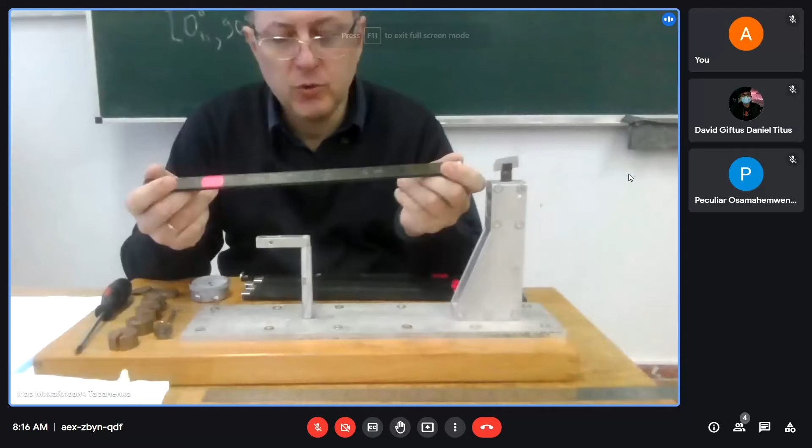Beams are the same. 0 degree, 15 degrees orientation, 30, 45, 60, and 75.

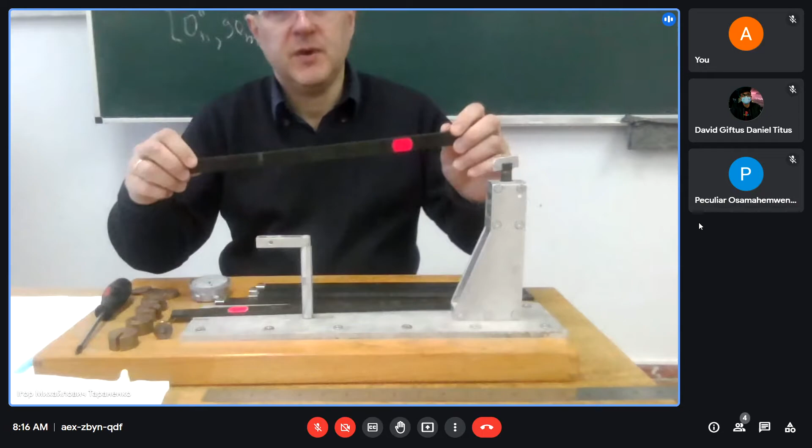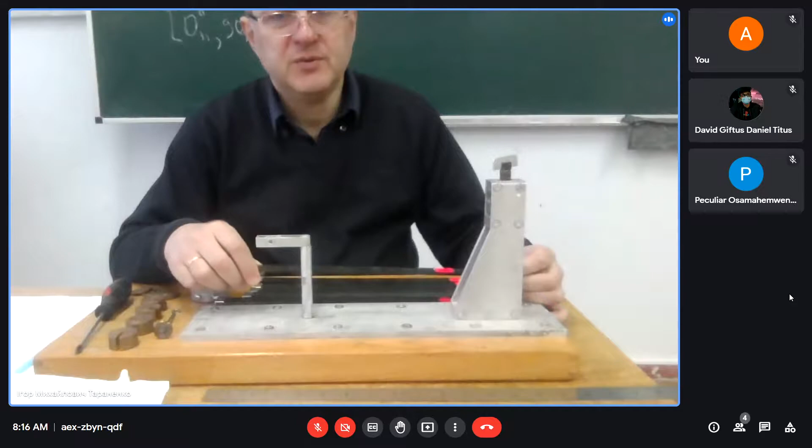Manufacturing process is the same, but during manufacturing some variation of dimensions can happen due to linear expansion, due to non-uniform spreading of polymeric resin through the fibers.

So we will calculate the average dimension of this beam. We need to know the height and the width to calculate the inertial moment. We need to know the length of this beam to calculate the deflection according to known formulas from the mechanics of structural materials.

And for this purpose, we use a very simple installation. It's a wooden rigid beam basement, and the device which simulates the clamping.

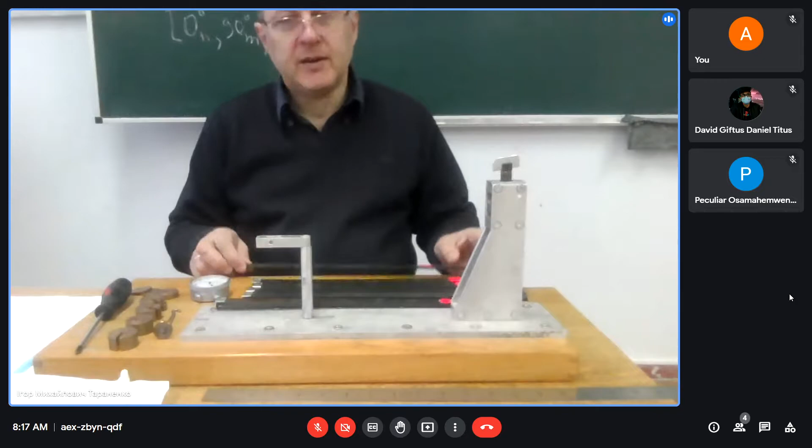So I can insert this beam, then tighten the screw. This means I simulate the rigid clamping. It's not absolute, but we assume, as our first assumption, that this is a rigid clamped beam.

Then we have, known for you from the course of interchangeability, the dial indicator. The dial indicator permits us to measure deflection.

For more precise measurements and local deformations of beams, we can use tensometric strain gauges. For absolute deflection for this lab it's quite enough to measure the deflection or sagging of this beam.

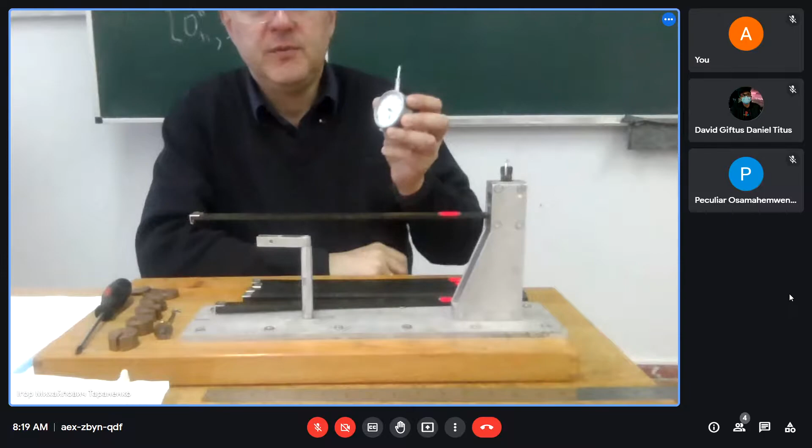So you remember that this dial indicator has divisions. One revolution of the long finger means a deflection of 1 millimeter. We have 100 divisions, so the spacing between any neighboring division is 0.01 of a millimeter.

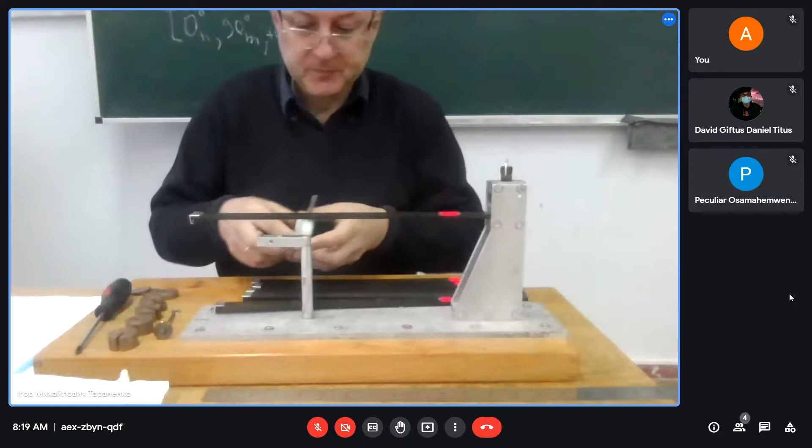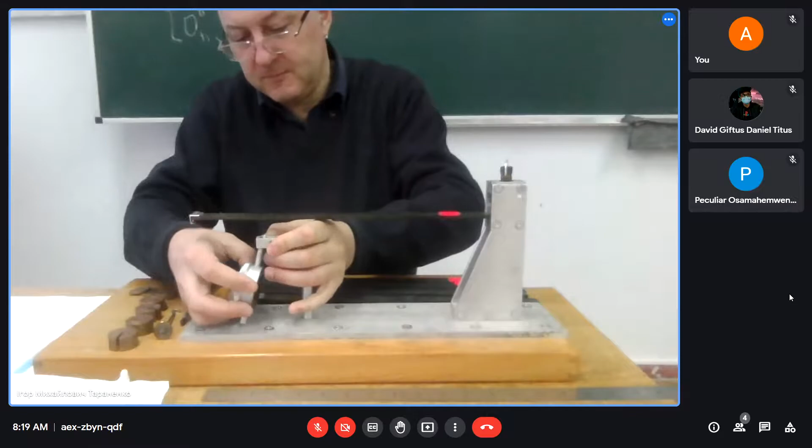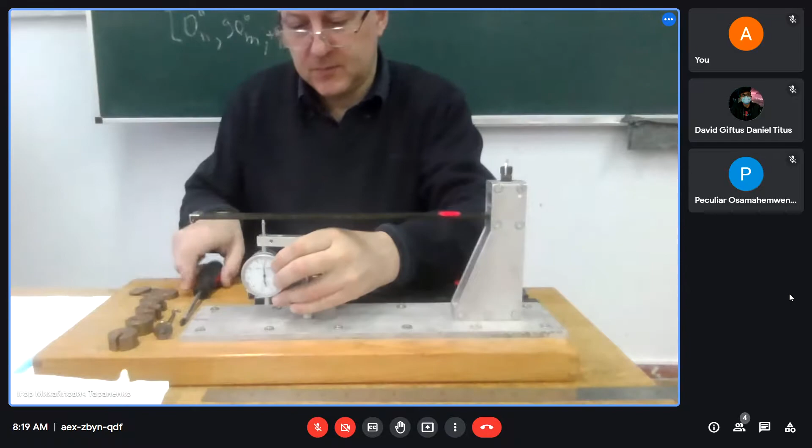So I can attach this dial indicator to the special clamping device. Clamp it with a screw.

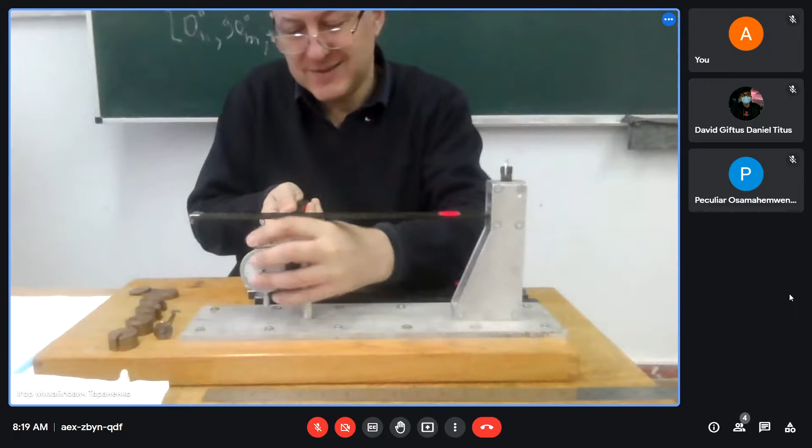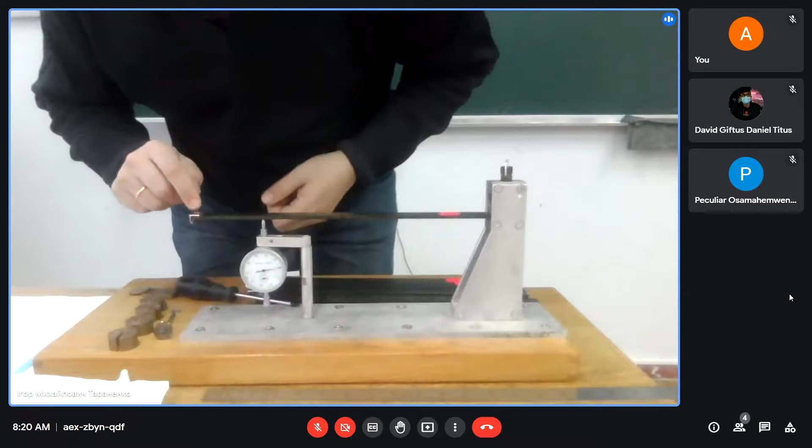And we can see, if we apply lateral force, the finger rotates, and we can measure deflection expressed in hundredths of a millimeter. For this purpose, we use a hook and a small platform.

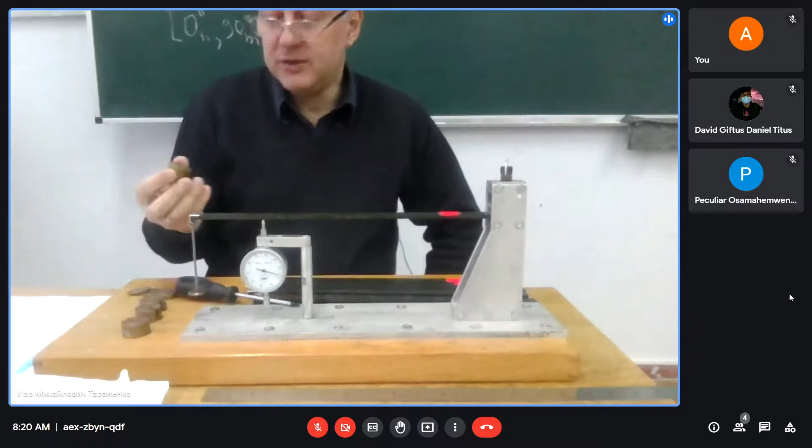On this platform we can hang weights of known mass. The mass is stamped here, for example here we can see 100 grams. Then for calculation we will convert grams to the international system, so we will operate in newtons.

I will consequently hang such weights one by one, calculate the total weight, convert to newtons, and measure by the dial indicator the corresponding degree of deflection.

And if we know rigidity, you remember rigidity is the product of elastic modulus by inertia moment. The inertia moment, as given in your lab with the drawn formula from the course of mechanics of materials, is width multiplied by thickness cubed, divided by 12.

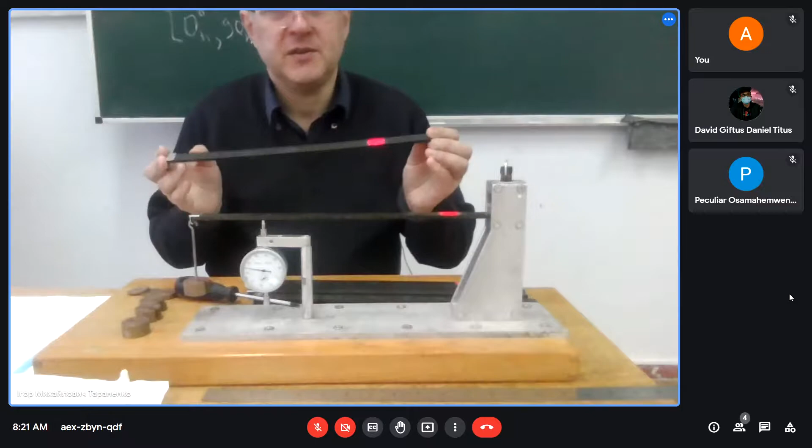So our task is to measure how deflection of the beam depends on orientation angle. We have 6 representative beams with different orientation angles, and we will apply 5 weights with a definite increment. Obviously, the more rigid the beam, the more weight we need to apply.

So the manufacturing process is the same. It's forming in rigid dies. Temperature, duration, and applied pressure are given in your manual, you can read it at the beginning.

So I can open this also. The scheme of testing is shown on figure 1. The real installation you can see here.

Let's start our measuring. In the current situation I will do it in online form. You have to do it by yourself.

So let's start with the beam with orientation of fibers at 0 degrees. 0, I repeat, means along the length. I take this beam.

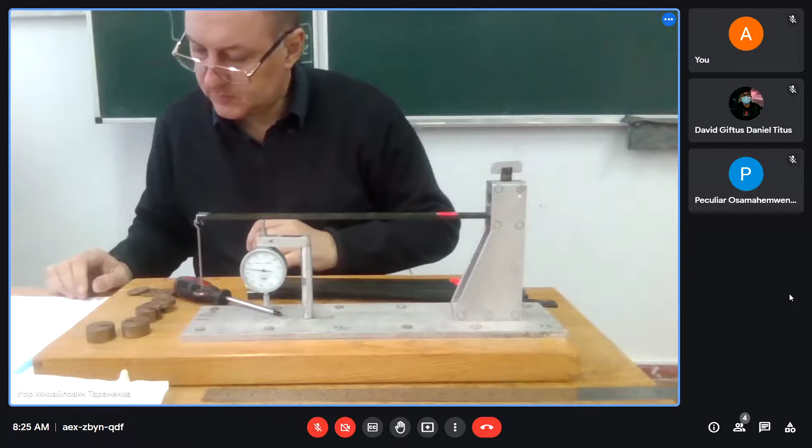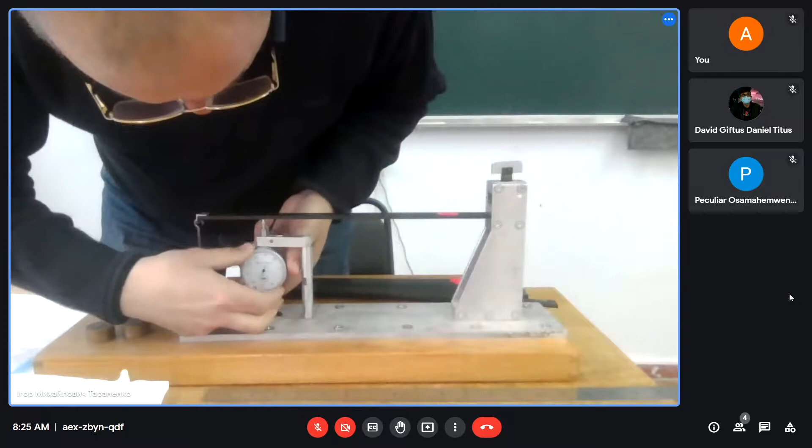So I adjust 0 here by means of rotation of this scale. I installed 0 on the dial indicator. And I apply weight with mass 100 grams, which is 1 Newton. Please write in the table: Q1 for specimen number 1 is 1.0, 1 Newton.

If we read, we can get 0.68. Please write 0.68. It's deflection V sub 1 for our beam with 0 degree. Right, where the cell corresponds to V sub 1, 0.68.

Then next increment, we add one more 99 grams. So totally it will be 199. Please write in the table, below, next stage of loading Q sub 2 for specimen number 1: 1.99 newtons.

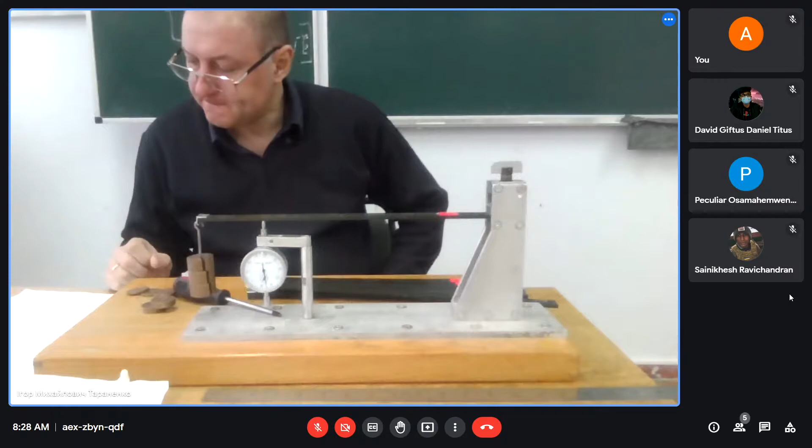Then we add one more increment, 48 and 49. So totally Q sub 4 is 3.95.

The deflection is 2.45, V sub 4 for the first specimen.

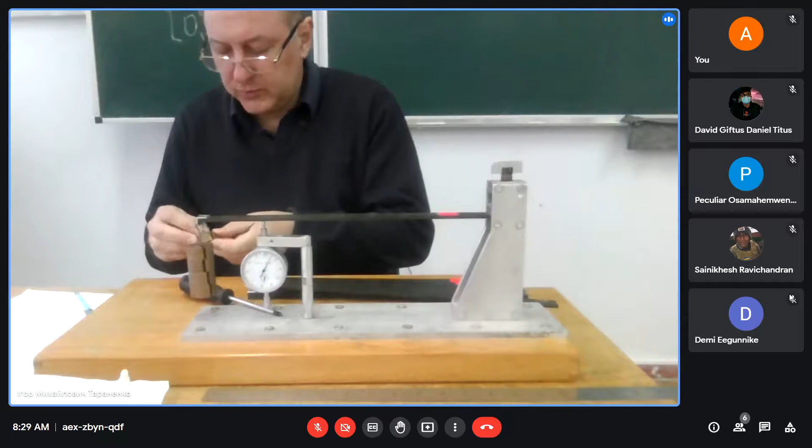And the last increment of loading, I add more several weights, and total lateral force applied is Q sub 5 for the first specimen, 4.83.

First column is filled, Q and V. Yes?

So now I unload the system.

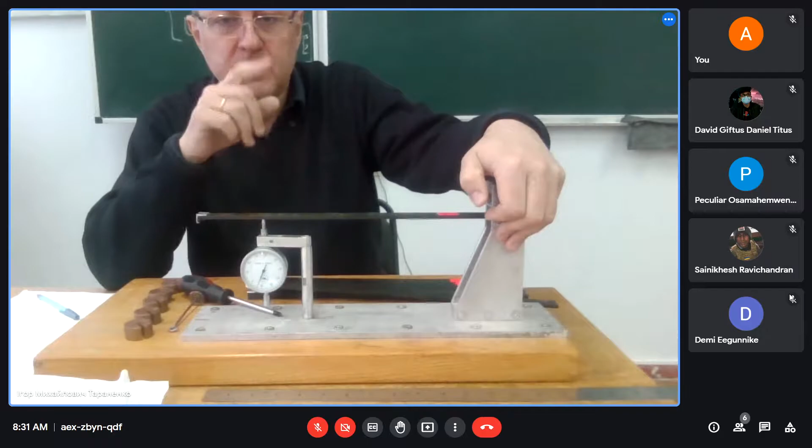I draw your attention. First assumption I told you: here we assume that clamping is fully rigid. Such questions will be in your tests, which you have to pass this lab fully, finally. Basement is rigid, no hesitation.

Then, third assumption, I draw your attention. Here we use a dial indicator. Dial indicator has a spring inside. Strictly speaking, when we apply load, the spring by itself restricts deflection also. But we neglect this resistance of the spring. We assume that resistance of this spring is negligible, no influence.

Deformation force is fully elastic. No plastic deformation, no energy losses on heat or other physical phenomena.

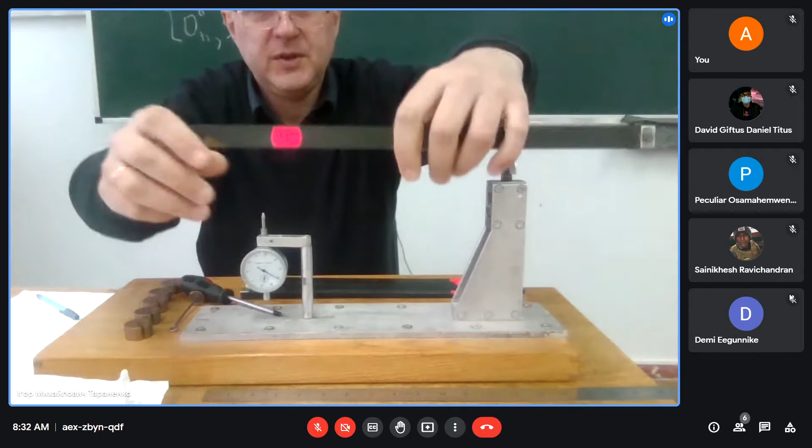Zero degree. Next, 15 - beam with 15 degree, with the same approximate cross section. Cross section we'll measure later. The same procedure, so I install the beam.

Then, when you understood how to conduct this, we need some parameters also of this installation, for calculation of the elasticity modulus for these beams. Please look at formula number 12 in the description of work. We need to know coefficient K. Coefficient K depends on total length L capital and the coordinate of the point at which we measure the deflection, distance A. These parameters are designated on figure 1.

So let's determine - I take the ruler and measure the spacing from the rigid clamping up to the point where we measure the deflection, and the total beam length where we apply lateral force. So we need two parameters.

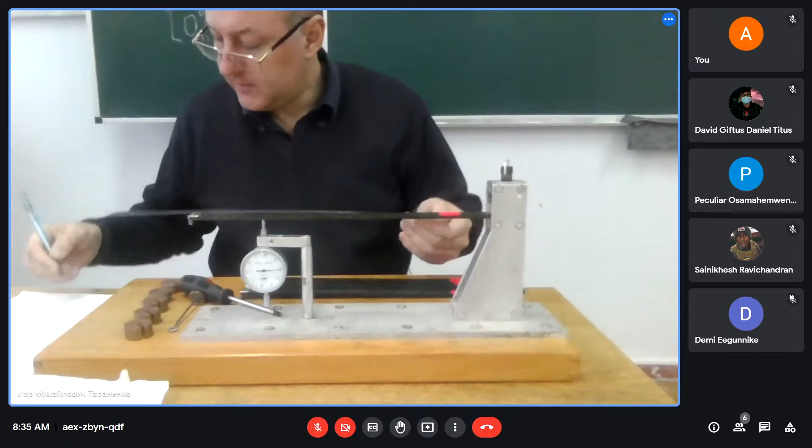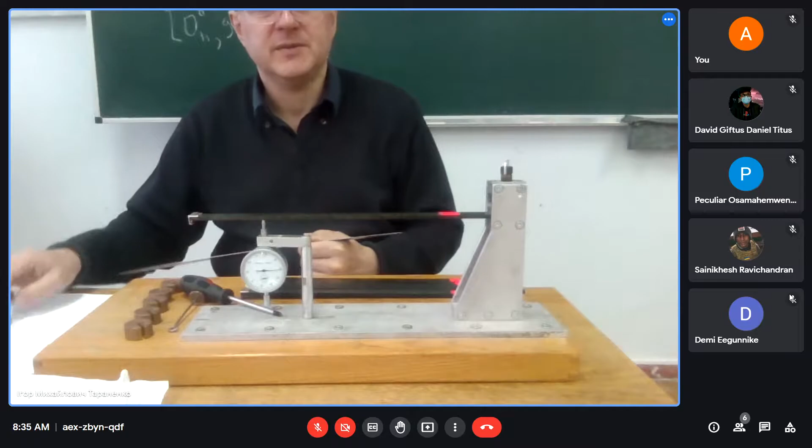The first one is parameter A, 0.275 of meters, expressed in meters, and total length L capital is 0.365 of meters. Clear? A is 0.275, L capital 0.365 meters. So these parameters are the same per each beam.

For a beam with rigidity 15 degrees, we will use the same increments of loading because the rigidity is very close, it's another but close. So I attach the hook with platform, then adjust 0, and continue to apply the same weights.

So you can write in column number 2, near number 2, please write also for better understanding 15 degrees. Specimen number 2, it's beam with 15-degree orientation. And rewrite Q1, Q sub 2, Q sub 3, sub 4, and sub 5. It will be the same like for beam number 1.

So 1.0, 1.99, 2.98, 3.95, and 4.83. And now our task is to find the corresponding sagging or deflection, vertical deflection from the lateral force applied. First weight.

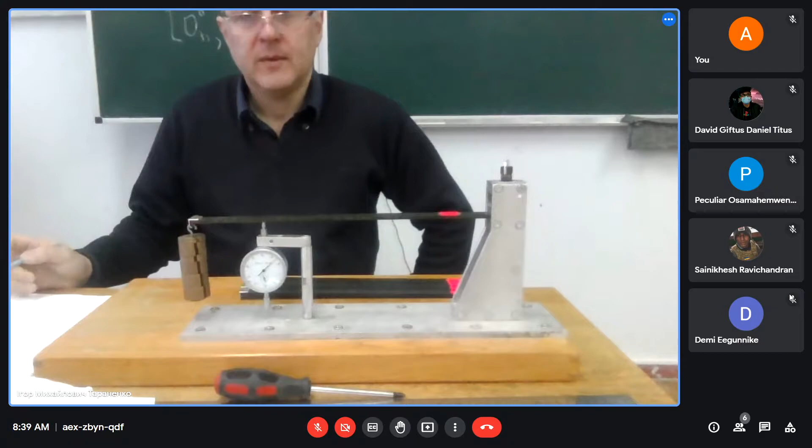And the fifth weight: .84. So I unload.

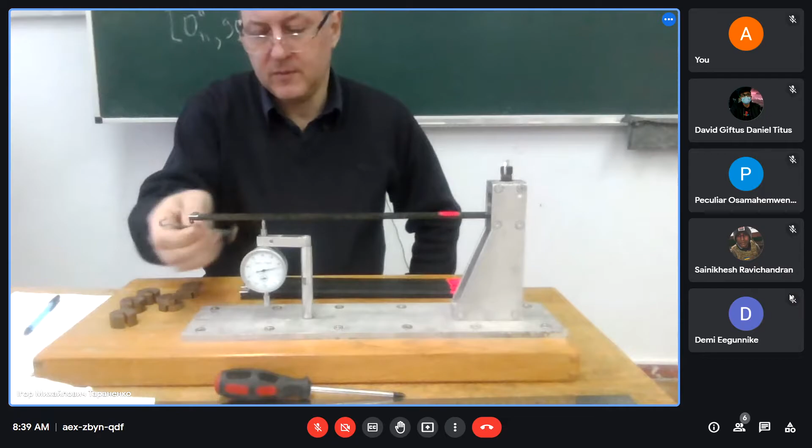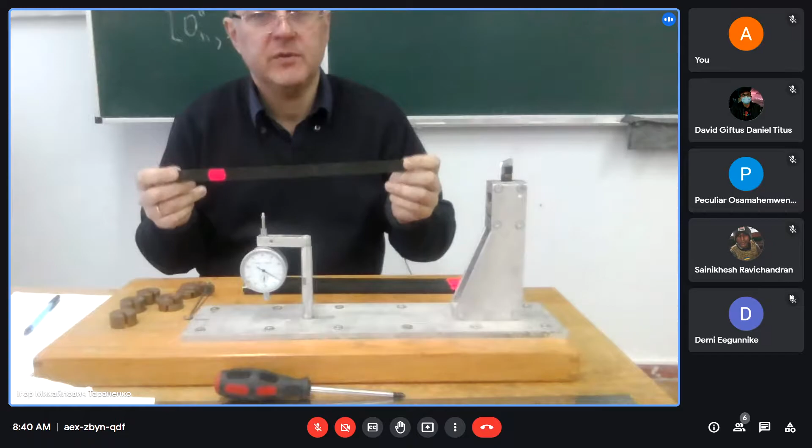.15. Next, beam with orientation plus minus 30. Plus minus means symmetrical loading. I told you last lecture, to escape warping during manufacturing and further operation, we have to keep a symmetrical scheme. If we have 0 degree plus 0, we add minus 0 to compensate warping due to linear expansion coefficients and Poisson's ratios. Plus minus 30.

Please, so I adjust 0 once again, 0 level.

So please write: beams with 30 degrees have less rigidity than previous beams, so we will reduce the increment. Please write for the third column, specimen number 3, also near 3 write plus minus 30, to understand what beam we analyze.

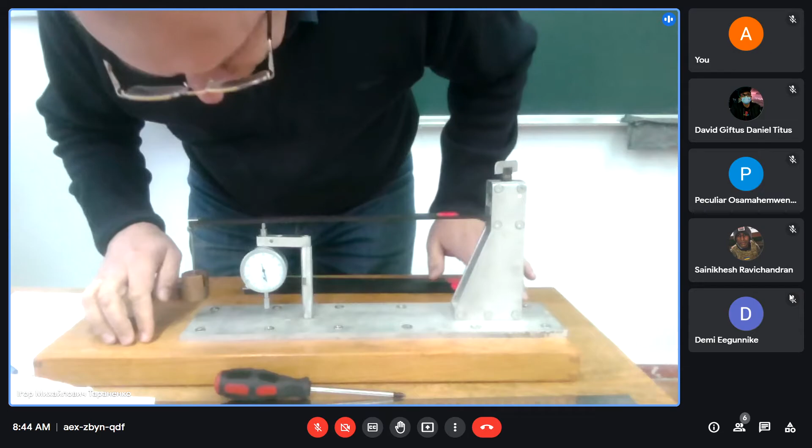One more millimeter is done. 3.16. And the last one, 4.21.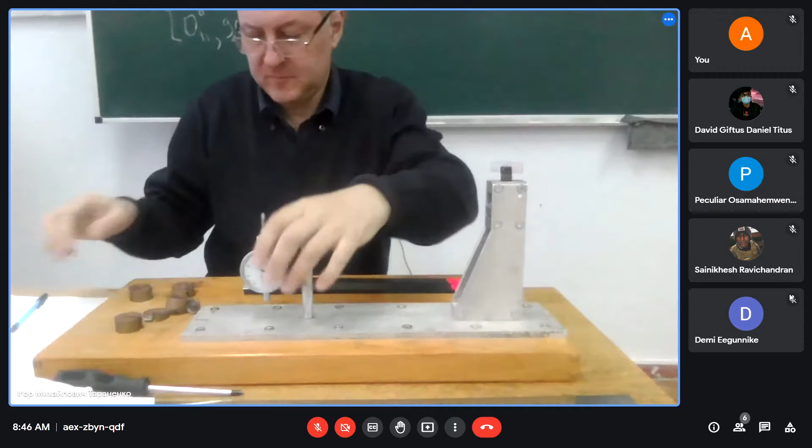The same weights for 45 degree, next beam. Specimen number 4, please write near number 4, 45 degree, column number 4.

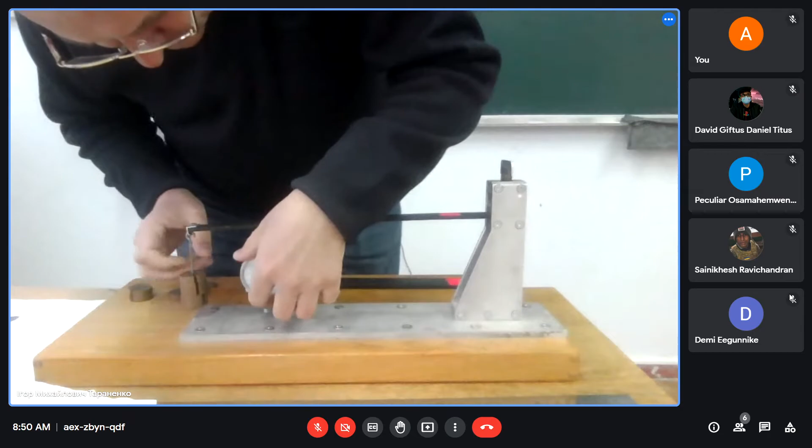So first increment, 0.68. Second increment, 3.20. 4.74. 5.98. And the last one, 6.38.

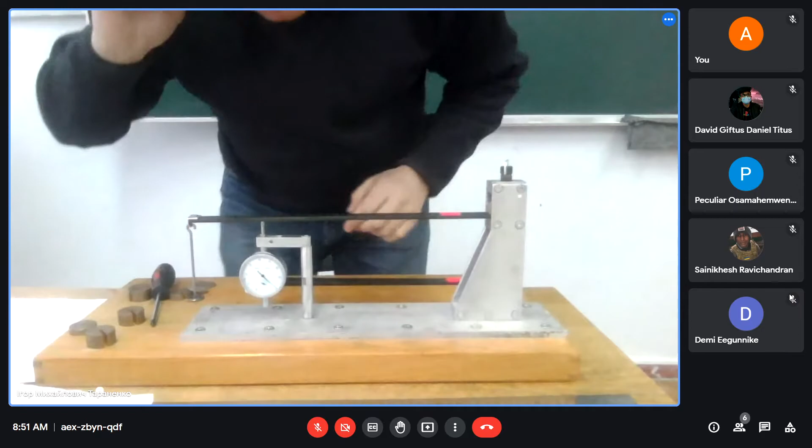Beam number 5, specimen number 5, plus minus 60, right, plus minus 60 in the header. For this beam, rigidity is less with previous variant. So please write increments of masses we can apply.

Q1, 0.19. Q2, 0.38. Third one is 0.950, 0.50. The fourth one, 0.88. And the last one, 0.99.

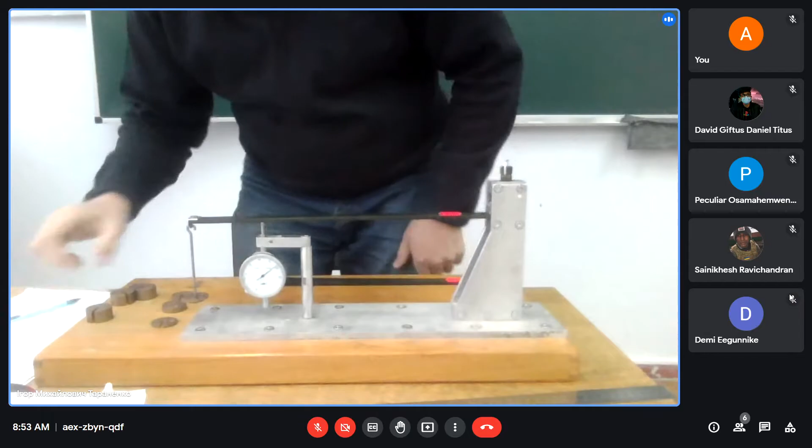So let's measure now. First increment, 0.19, 0.78. Second increment, 1.45. Third increment, 0.50, 3.61, 5.60.

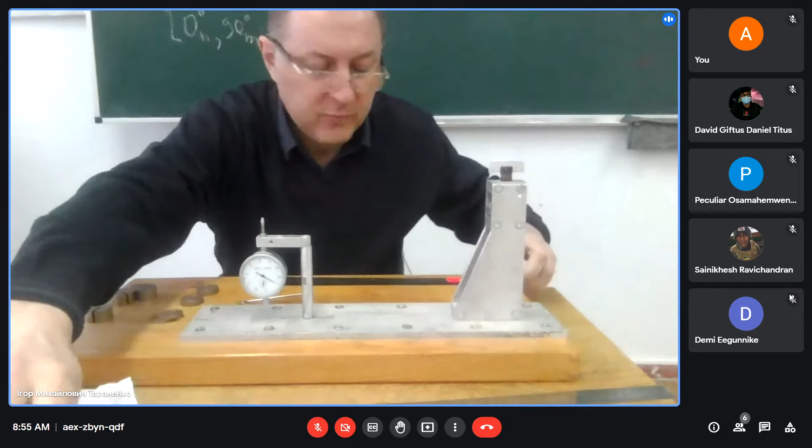The last, 8.02. And the same increments for the last beam, with orientation of fibers 75, plus minus 75.

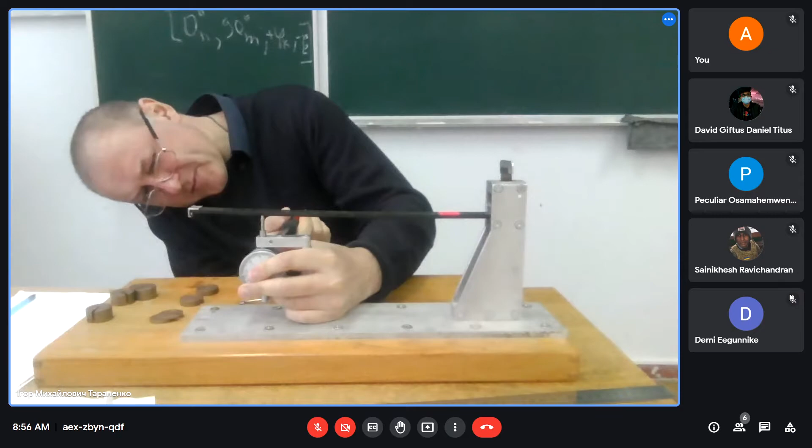Gentlemen, please answer my question. Why we don't test beam with orientation 90 degree? Why we don't test 90 degree beam? No suggestion. It will be, if you don't want to think, it's your question for your test.

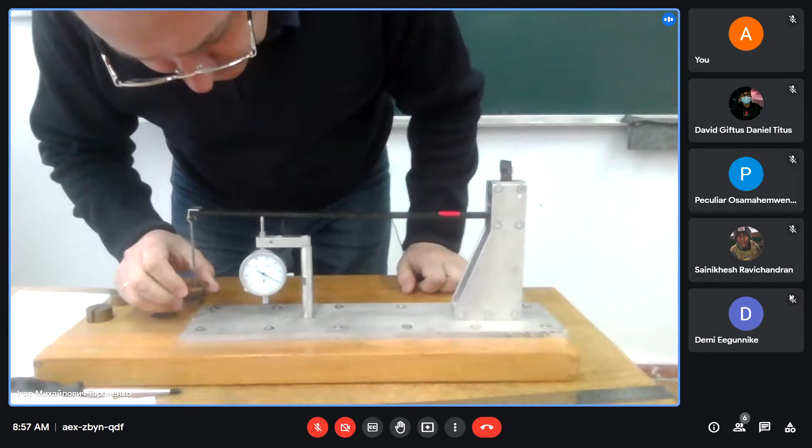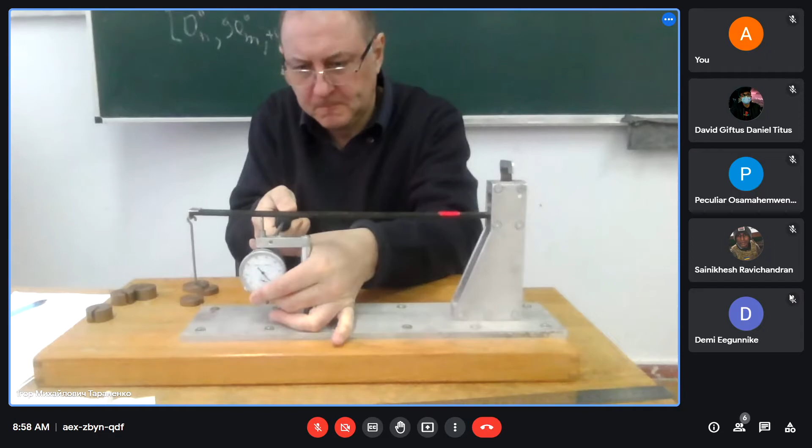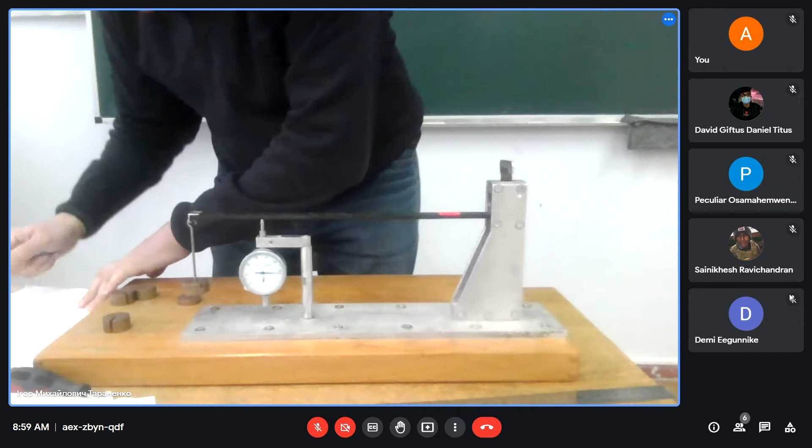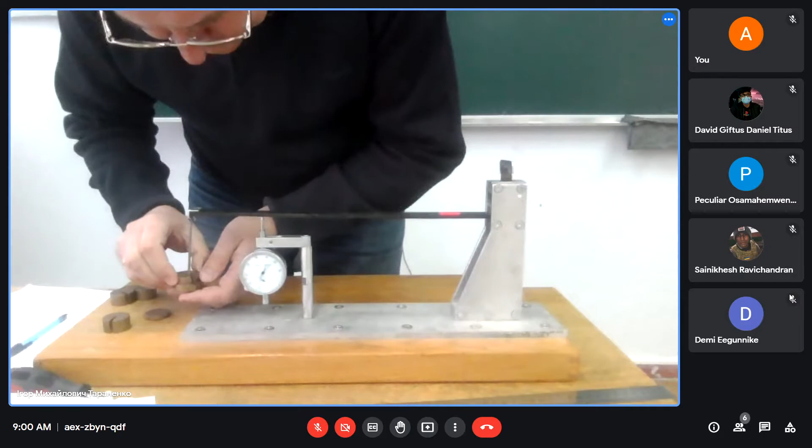First, adjust 0. And first weight, 0.19, 0.16. Next increment, 1.55, 4.28, 5.90. And the last one, 9.56.

So we found what is the dependence of beam deflection on reinforcing angle. Then you can numerically calculate elasticity modulus. For calculation, but I draw your attention, it's mentioned in your manual. Also, it's a question from your tests.

If we look to the formula in item 12, elasticity modulus E sub I is equal to lateral force Q divided by deflection or sagging V sub I, inertia moment, and multiply by coefficient. So what conclusion can we make? Elasticity modulus is a constant value, it's a characteristic of a given material. K is a constant characteristic depending on our installation, depends on A and L, geometrical parameters. J sub X, inertia moment, also a constant value depending on cross section, rectangular cross section, width and height. So it means Q divided by V, force by deflection, is a constant value.

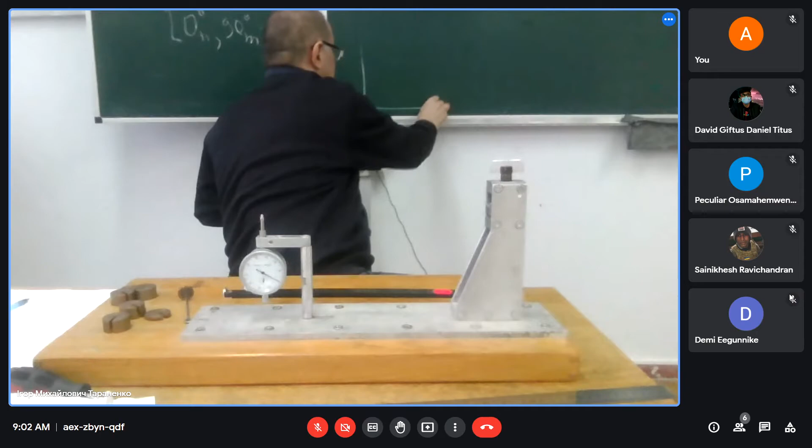So the dependence is linear. What does it mean? When you draw the graphical dependence, Q as a function of deflection, you have such a graph. Then you will have five points per each beam, 5 experimental points. It means you need to join them with a straight line, not a curved line, with a straight line, for example, by the method of least squares.

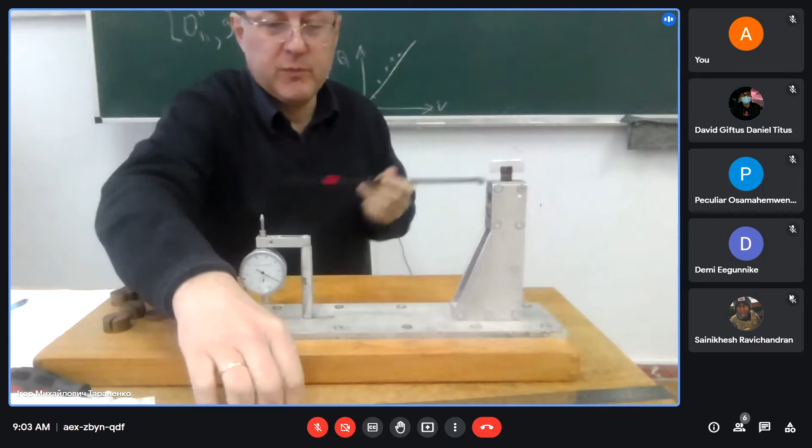Now we need to determine geometrical parameters, width and height or thickness of our beam. Technology influences these parameters. So for determination of width, we use a caliper, known to you, the caliper. I have a caliper now with precision of measuring written here, 0.02 of a millimeter. I will measure, please open your manual, page 5, table 1. Also, we have 6 beams: 0, 15, 30, 45, 60, 75.

Per each beam, we measure thickness in 5 different places along the length, and then below, 5 values of width B, from B sub 1 up to B sub 5. Then we calculate the average value of delta thickness and average value of B width, summarize and divide by 5. Then variation coefficients tell us what is the precision of manufacturing, what is the scattering of these parameters. J sub x is the inertia moment.

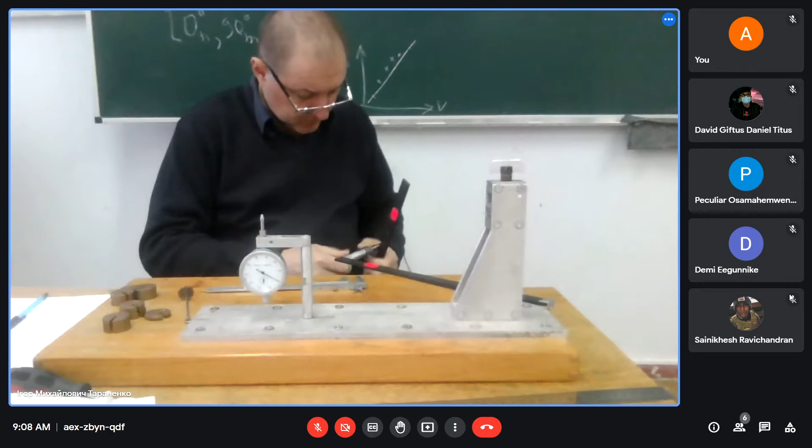Along the length, Delta 2: 4.99. Delta 3: 5.02. Delta 4: 4.98. Delta 5: 5.12. So you can see that variation of height along the length is presented due to some distinction of the manufacturing process.

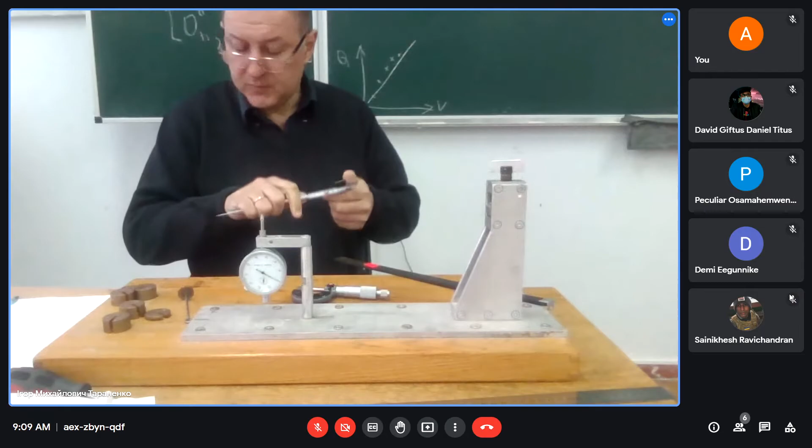Then width: B sub 1 because of 0 degree, 20.32. B sub 2, 20.26. B sub 3, 20.16. B sub 4, 20.20. And B sub 5, 20.46.

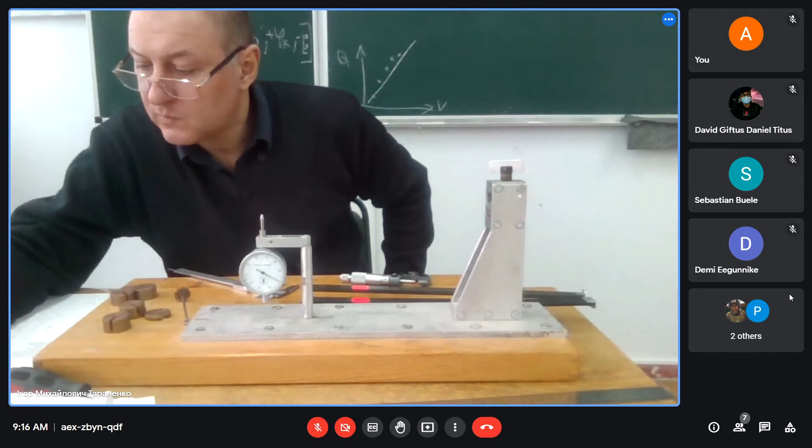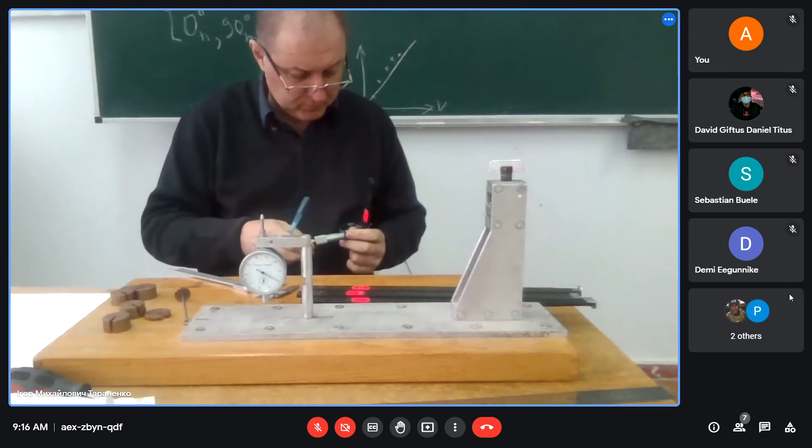Forty-five degree. Thickness: 5.03, 5.32, 5.10, 5.06, and 4.90.

Width B: 19.92, 19.80, 19.86, 19.96, and the last, 19.84.

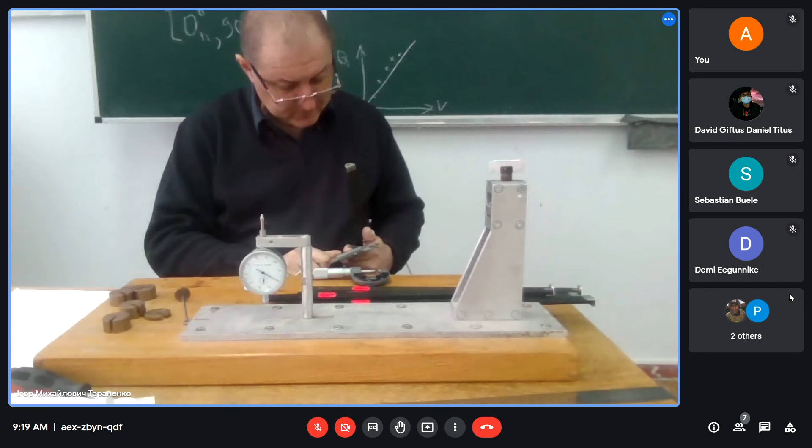Width: 20.06, 19.86, 20.04, 20.20, 20.28.

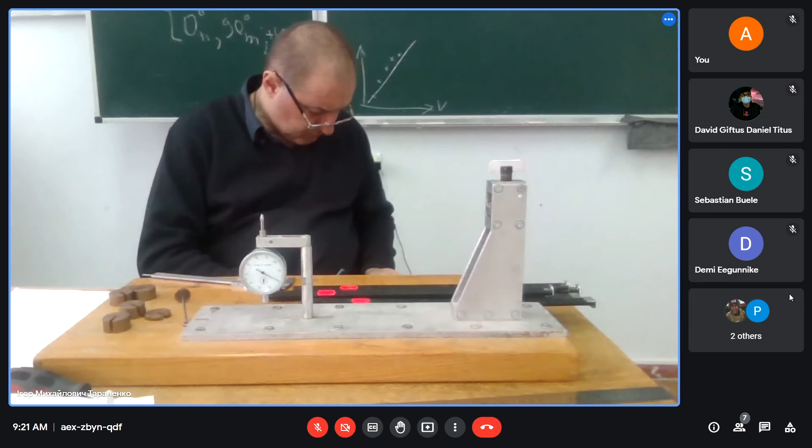And the last beam, 75 degree. Thickness: 5.10, 5.02, 4.96, 5.06, 5.10.

Width: 20.10, 20.16, 20.28, 20.22, 20.36.

So now you have all data for calculation of average value. Each delta, summarize and divide by 5, and insert into the cell delta without subindex. The same for B, for the width. Coefficients of variation - meaning of coefficient: the less the value of variation coefficient, the more precision.

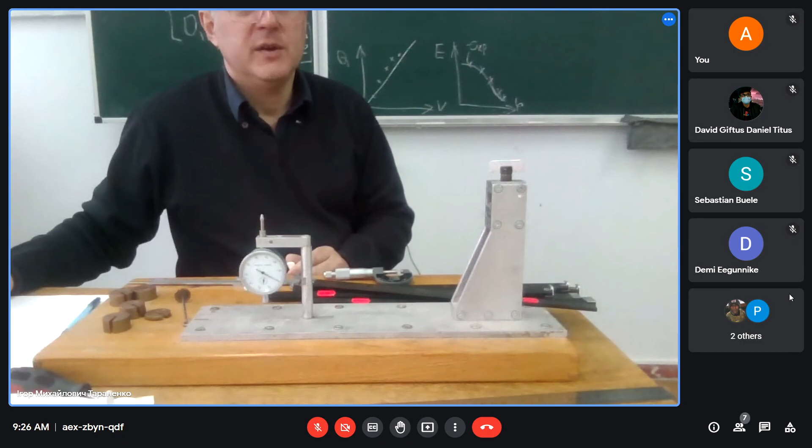It's our first beam and fourth beam - first and fourth. Then we calculate EZ90, parameter A, and then we use the formula EZ theoretical for any angle phi. So in this formula, please insert angle phi, which varies from 0 up to 90. So 90 we can insert into this formula, in spite of the absence of this beam at testing. Why not? Please think - why we don't test the 90 degree beam?

And on the same graph, please draw a second curve, the theoretical curve, and compare what is the convergence between the experimental curve and theoretical.

So in the conclusion, you have to write at least 3 main thoughts. First conclusion: that the dependence between applied force and deflection is linear - more force applied, more deflection.

Second moment: that elasticity modulus non-linearly depends on angle phi. Maximum corresponds to 0 degree, minimum to 90 degree. And the third item of conclusion: that you found the experimental dependence and calculated theoretical - how do they coincide? What is the convergence of your experimental results with respect to theoretical?